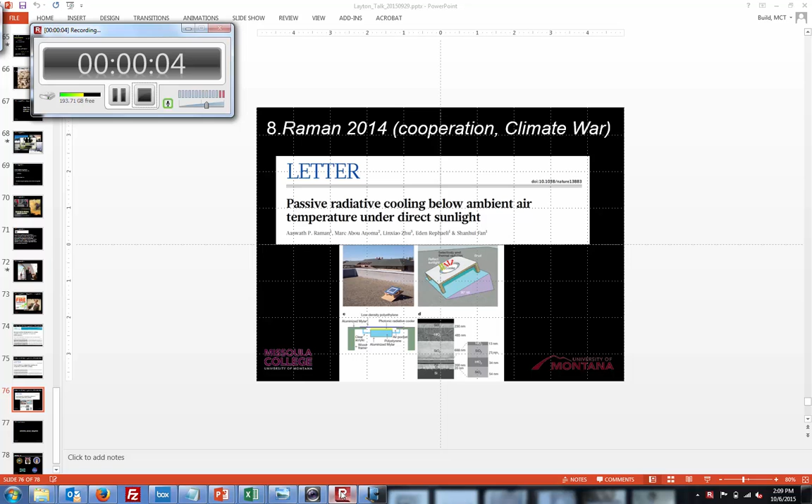There was another meeting recently where Billy Joe Kipp, the president of Blackfeet Community College, came down, and our collaboration between the Energy Technology Program and the Blackfeet Community College has been a very positive thing. One thing that we've sort of refrained from doing is saying, hey, we're going to come up and save the day here with all this stuff. It really is a two-way street.

When we had the Blackfeet here, I learned that a lot of my kind of very quick and direct form of communication was not really appropriate in a lot of ways. And it's sort of like, okay, now we're going to take turns, and you're going to listen to me for a while. And it turned out to be a great learning experience for me. But some of the things that we've been sharing with them, like, hey, there are ways to make electricity from wind. There are ways to make heat directly from the sun.

So that's what we're going to do in Browning on Thursday, install one of these solar thermal outfits that we built last week, and install it on the home of one of the students that were here. It was a similar system that I had on my office on an experimental basis. The thing got so hot that we were melting styrofoam, so that was an issue. So we've since moved on to using fiberglass as an insulation.

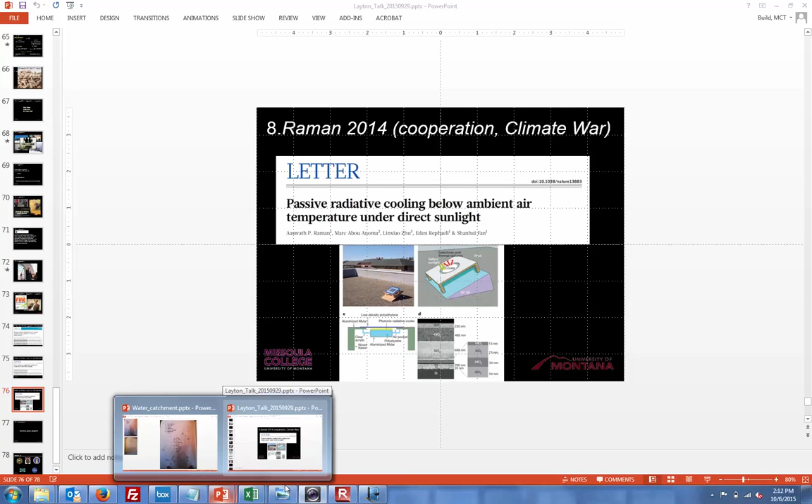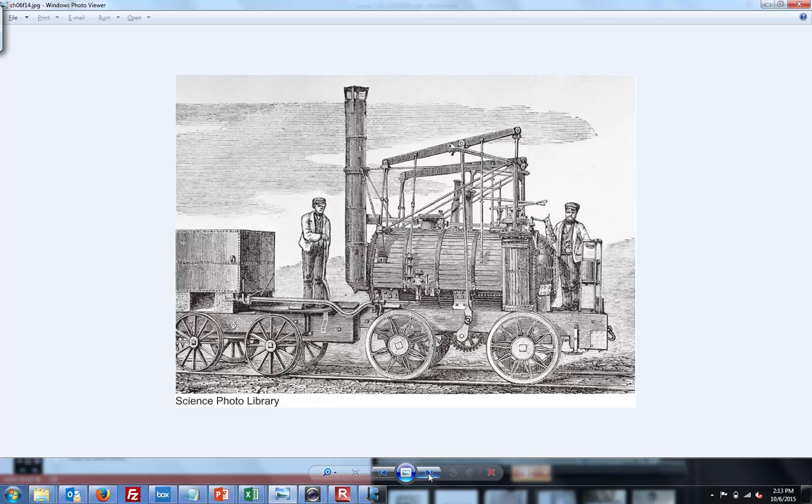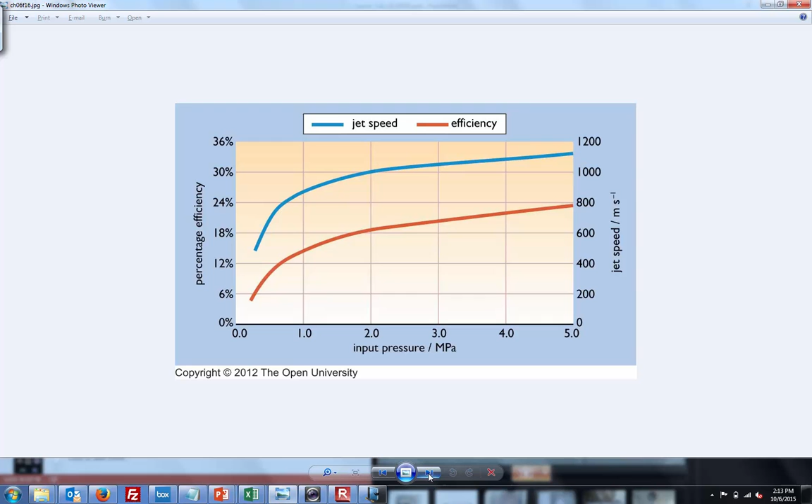Okay, so the next section here is all about steam turbines. And I'm going to skip ahead one little shot here. Okay, so the engines that we've looked at up to now, and I'm on page 198, looking at figure 6-17. This is still heat to motive power, but what you can see is that we've skipped the reciprocation step. There is no cylinder here. Nothing has to go back and forth and up and down. Every time you're going back and forth, up and down, you're more or less losing additional energy to acceleration and to friction and all that.

So the answer was to come up with something that still took steam, and what you can do is imagine steam coming in. Now, in this case, you can see that the blades themselves go from short to tall. And so at the right-hand side, if you can imagine an outer casing which has been removed, the outer casing is more or less going to form a seal between the blades and the chamber.

So steam comes in, and you can see each one of these blades is tipped just so, and so the momentum of the steam, or the kinetic energy, if you will, of the steam coming in here pushes each one of these little blades to the right, or if we were looking down the barrel of this, it's going to spin them in the counterclockwise direction.

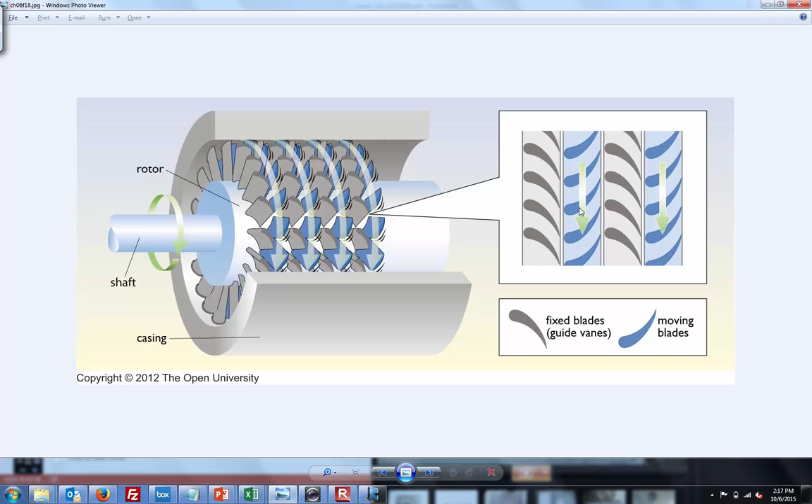So obviously, as these moving blades spin, you've got your motive power. Okay, attach this guy to a boat and a propeller, and away you go. It's in a similar way, well, maybe not so similar. You've probably all seen jet skis. Jet skis are going to have some kind of propeller, or impeller as it's typically called, in the back. Same thing, but in the case of the jet ski, you usually have an internal combustion engine spinning a shaft, etc. But you can imagine with a turbine prop, no need for reciprocation.

Basically, you just have a valve that regulates the amount of steam that goes into that for your throttle. And again, you're going to want that steam as hot as possible, without obviously melting the parts or what have you. But let's just read this thing here. It says the high rotational speed. So these systems, especially these smaller systems, have to rotate fairly quickly as the steam moves through.

So the high rotational speeds meant that the steam turbine never became a serious option as a propulsive system for road vehicles. And that's why we don't see it; maybe out in some of these desert competitions you might see rockets attached to cars and whatever, but not so great for just getting around town. Nor did it displace the reciprocating steam engine for locomotives. Again, you're kind of looking for higher torque, not higher RPM. And in general, the turbines give you high RPM but kind of low torque. And I think you guys understand that.

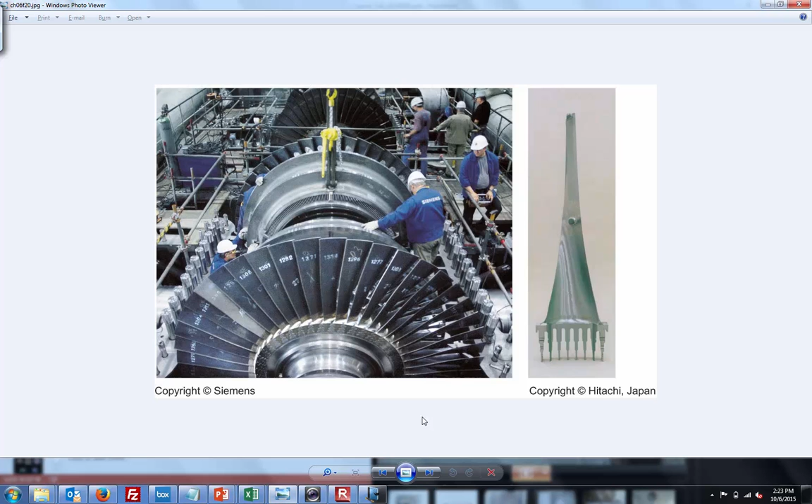And obviously these are still heat engines. Steam still goes through them and turns into rotational energy. What's happening on the back end of this thing, though? What's it ultimately being converted into? Electricity. Yeah, electricity. So you get some magnets on there, and electricity is being pumped out. These things can become more and more complex and more efficient. Very similar concept to what we saw with that brass opened-up turbine. You've got high pressure, everything's small, and things are going through quickly, high pressure, high temperature.

As that gas expands, it's still not all the way down to atmospheric pressure. So if you remember back when we were talking about Carnot's equation, you've still got a little bit of residual heat coming through, right? That T1, temperature 1, is still sort of out here in the atmosphere somewhere. So even though the steam in the high pressure system has lost a lot of its thermal energy, it's still not all the way at the bottom. You use it in this intermediate pressure turbine.

Why is it set up this way? Well, it's just more compact. It goes in at the high pressure side, comes out the low pressure side, into this intermediate system, then to a yet lower pressure, and finally out to the generator. So the top one is called the tandem compound, and the bottom one is called a cross compound. So you could have two separate generators running at two separate speeds rather than everything tied into one single shaft.

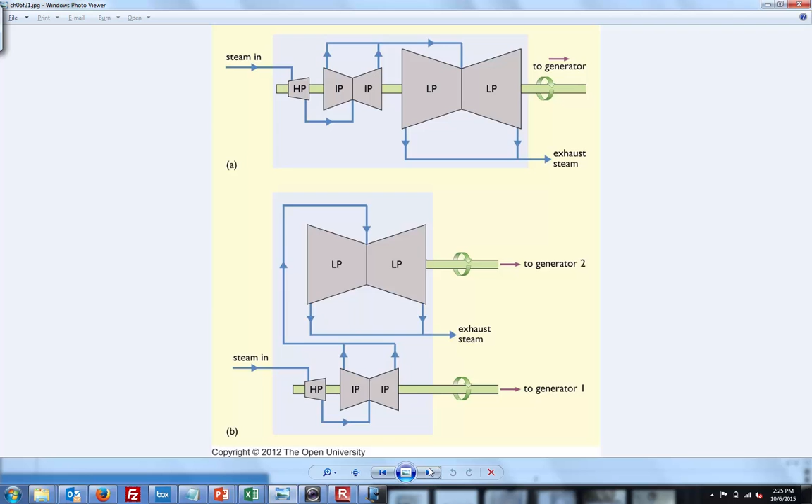Okay. And then cooling tower, we sort of see some of the same thermodynamics going on here. So in order for these systems to operate at their highest efficiency, you want to have the hot temperature as hot as possible and the low temperature as low as possible. Where are you going to get that low stuff? Well, just from Mother Nature, right? Just coming in at whatever temperature she provides.

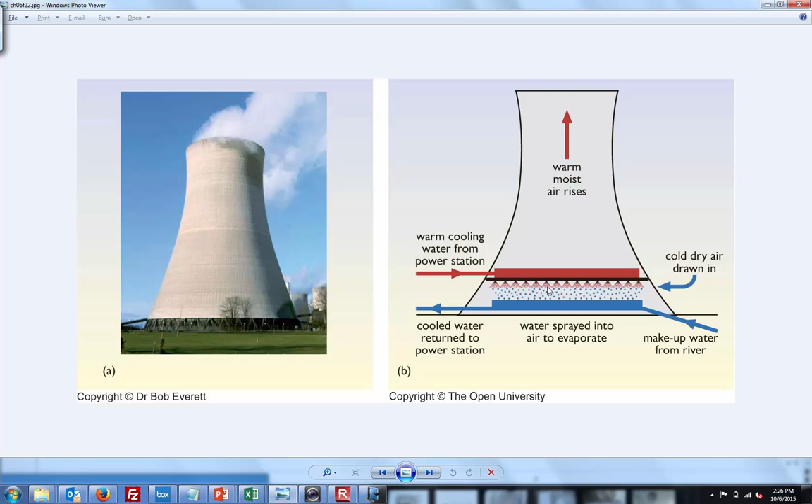And so through this, you then get your nice big delta T. You're allowing that delta T to happen in the cooling tower. And this is just a much bigger version, really, David, from that question you had about the other stationary tank. It's the exact same version, just a much larger embodiment of that.

Hey, take care. See you around.

Atmospheric pressure is 100 kilopascals. So what's coming out of here is about 10% higher. So 15 psi, we're looking basically at 1.5 psi. Very, very low. Oh, 10 kilopascals. Well, it's only 10% of atmospheric pressure, which is 15 psi, so we're looking at 1.5.

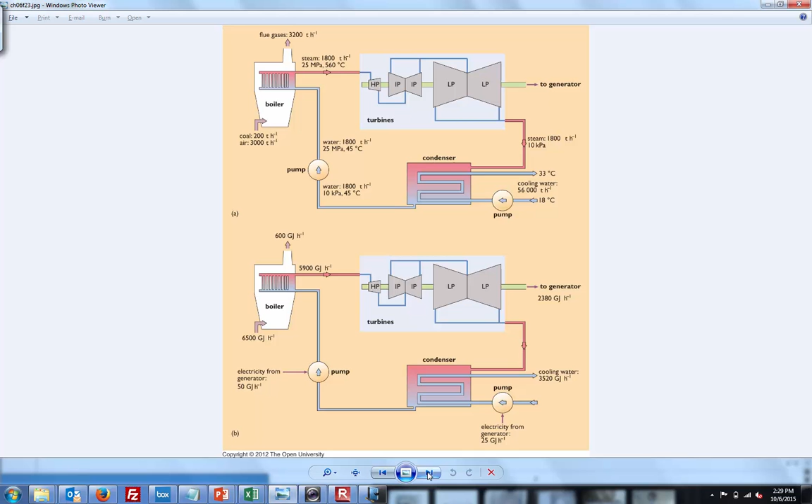So those are really the highlights of the chapter. We went into a lot of detail; I'll just summarize here. We started off really with just the thermal capacity equation, if you will. We looked at the relationship between temperature and heat, decided that all of these energies are measured in joules. We did a little bit of units analysis.

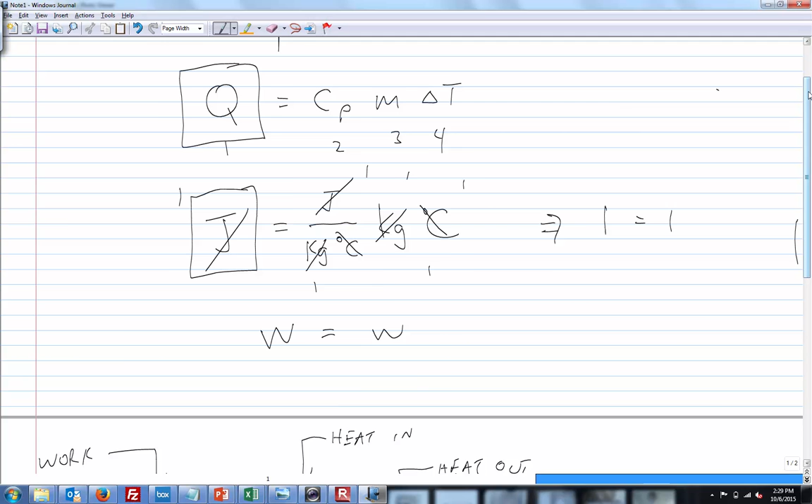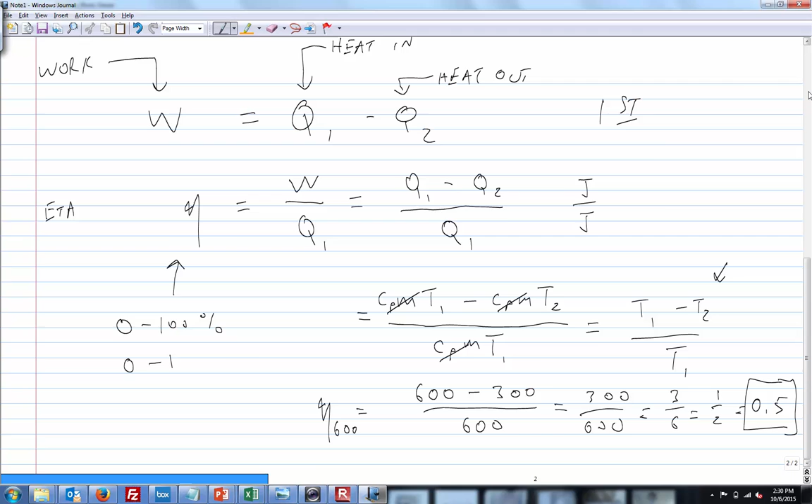We then went down and I hope did a nice job explaining thermal efficiency and why you can't ever really hit 100% efficiency, looking at some of the challenges that Carnot saw 150 years ago with the steam engines, and then took a reasonable look at some of the specific technologies. So again, I really like that chapter a lot.